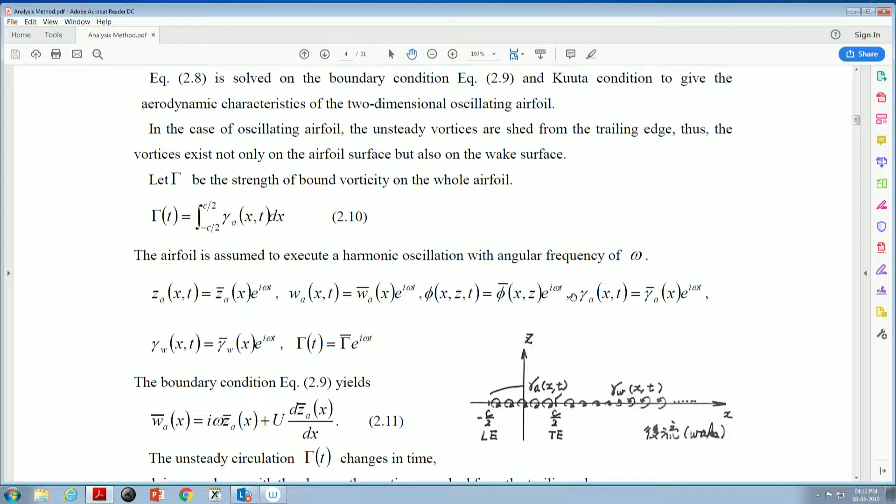Capital gamma is the strength of the bound vorticity on the whole airfoil, the circulation, expressed by this equation. Gamma A is integrated from the leading edge to the trailing edge. The airfoil is assumed to execute a harmonic oscillation, so we write the time term as exponential i omega t, and all variables are expressed in this form.

The boundary condition is written like this, equation 2.11. The unsteady circulation, capital gamma, changes in time, and in accordance with this change, vortices are shed from the trailing edge. At time t, gamma is gamma(t). At time t plus dt, gamma is expressed like this.

Only the first term is retained here. If the wake vortex strength is gamma W, shed from the trailing edge during time dt, equation 2.12 is derived from Kelvin's theorem. This represents the temporal change of the circulation, which is compensated by the wake vortex shed here.

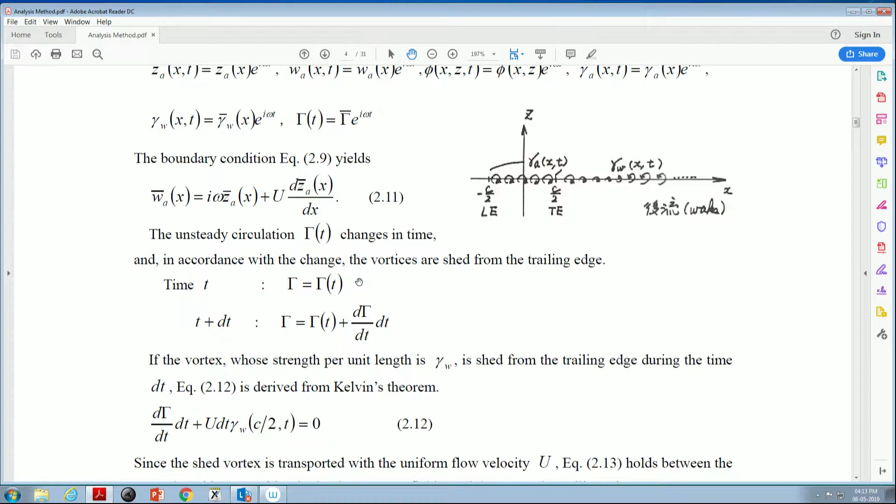As I previously said, gamma W is not independent from gamma A, because gamma W is shed from gamma A. So there is a relationship between gamma A and gamma W. Since the shed vortex is transported with the uniform flow velocity capital U, gamma W at an arbitrary position in the downstream field is related to gamma W at the trailing edge.

The right-hand side is the arbitrary position X. So gamma W at the arbitrary position downstream is related to gamma W at the trailing edge with the time lag shown here.

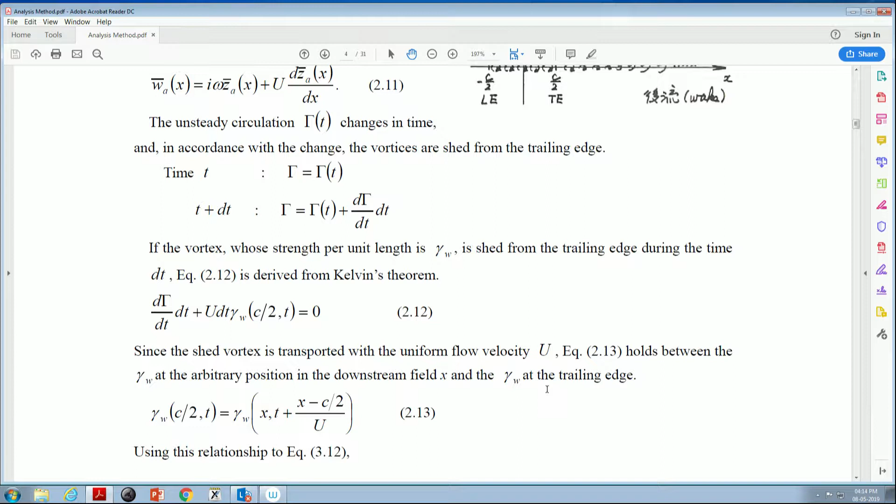Using this relationship in equation 2.12, we substitute gamma W into this expression, and we obtain this relationship with capital gamma. Capital gamma contains, of course, gamma A, so gamma A and gamma W are connected through this equation, which can be rewritten as 2.14.

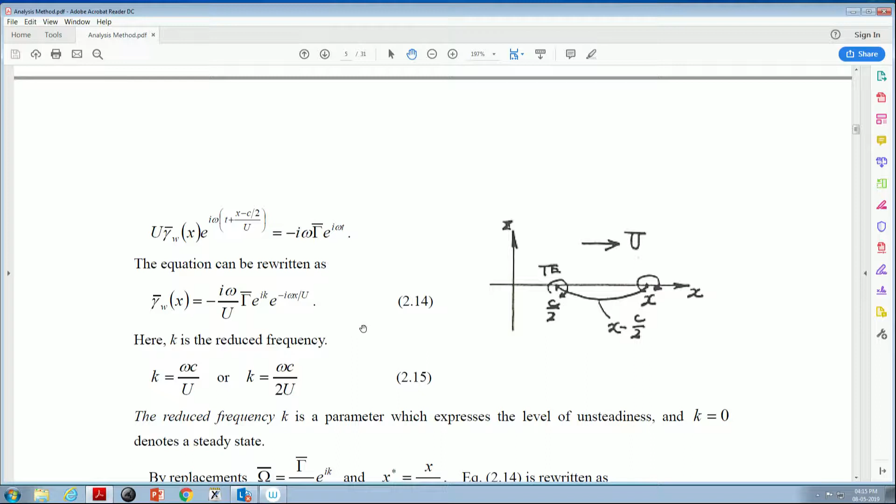Here a non-dimensional parameter K emerges, called the reduced frequency. This was also shown by Professor Maiti on the first day. The definition of K depends on whether we use the chord length or the half-chord (semi-chord) length, so we have to be careful—there are two kinds of K, differing here and doubly here.

The reduced frequency K is a parameter expressing the level of unsteadiness. K equals 0 denotes the steady state or quasi-steady state. Some replacement is done, non-dimensionalizing X or something, and then gamma W is rewritten as equation 2.16, which is a circulation parameter.

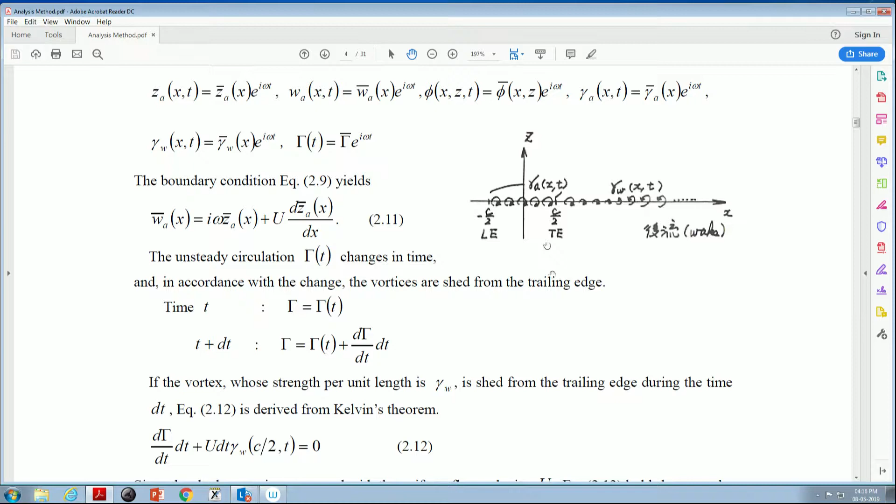We'll calculate WA, the induced velocity on the blade, in the Z direction. This WA can be calculated by the Biot-Savart law, as shown here.

The first term is the induced velocity from gamma A, the bound vorticity on the airfoil, integrated from the leading edge to the trailing edge. The second integration, from the trailing edge to infinity, is the induced velocity from gamma W, the wake vortices. So both vortices must be considered to calculate the induced velocity on the blade.

Using equation 2.16 for gamma W substituted here, we obtain equation 2.17. Here we have gamma A, which is the unknown parameter, and we changed the expression of gamma W into the circulation parameter form. So this is an integral equation for the unknown gamma A.

This is from a long time ago. It was analyzed by Professor Kutta and Professor Söhnge, and we need Söhnge's inverse formula here.

So from this integral equation, we directly have gamma A, the explicit expression of gamma A shown here, equation 2.18.

But be careful: on the right-hand side there is a circulation parameter omega, and it also contains gamma A. So it's not a free explicit expression of gamma A. We have to calculate this circulation parameter in another way.

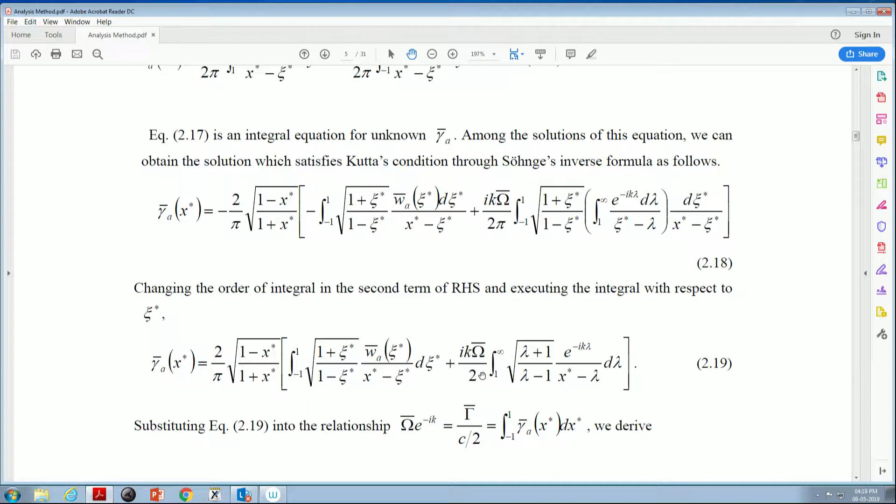So then we proceed with the integration calculation and we have 2.19. This relationship gives us omega, expressed like this. Using 2.19 into this equation, we derive 2.20 for the circulation parameter omega.

But in this expression we have WA on the right-hand side, so if we use the boundary condition here, we can calculate this circulation parameter. Then we use this circulation parameter in the previous expression, 2.19, and in this process we can finally get the value of gamma A successfully.

As written here, if WA bar is given based on the boundary condition, the unknown vorticity gamma A bar can be obtained from equations 2.19 and 2.20. So we got the value of gamma A.

So then we'd like to have the pressure data, or unsteady aerodynamic force on the blade. The pressure difference between upper and lower surface of an airfoil, delta PA, is related to the vorticity gamma A, so we'll calculate that relationship.

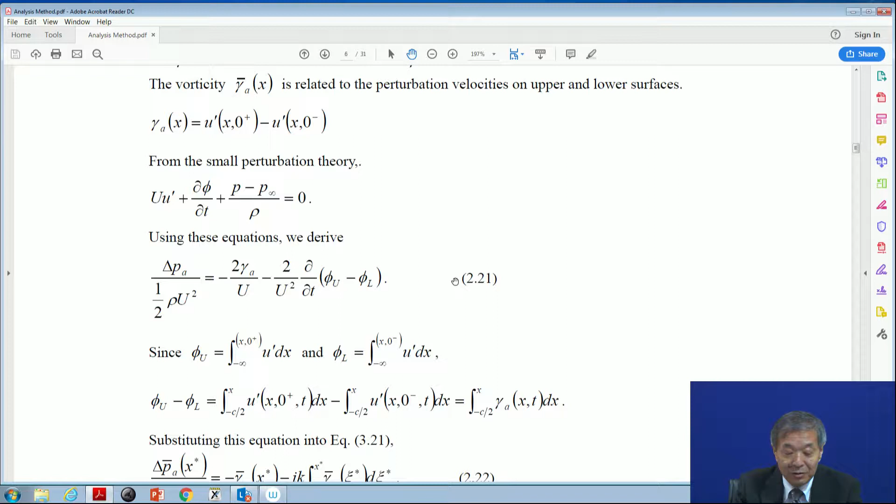So if we use this expression in this one here, finally we can get the delta PA expression in terms of gamma A only. So we could get the value of gamma A.

And if we use the gamma A value in this equation, we can calculate the pressure difference between the upper surface and lower surface, which is directly connected to the unsteady aerodynamic force on the blade.

And if we use equation 2.19 for gamma A into 2.22 here, we can calculate the pressure difference like this. This is the final form of the pressure difference between the upper surface and lower surface of a blade.

Here we have a function lambda expressed like this, and we also have the function Ck that emerges here. This function is called the Theodorsen function, given by this expression, Ck is a combination of Hankel functions.

So we need to get this, it's a function of the reduced frequency, and we put it into this equation. As I will show later, this Theodorsen function is the correcting term from the quasi-steady state to the unsteady state, so it's directly connected to the unsteadiness of the flow field or phenomenon.

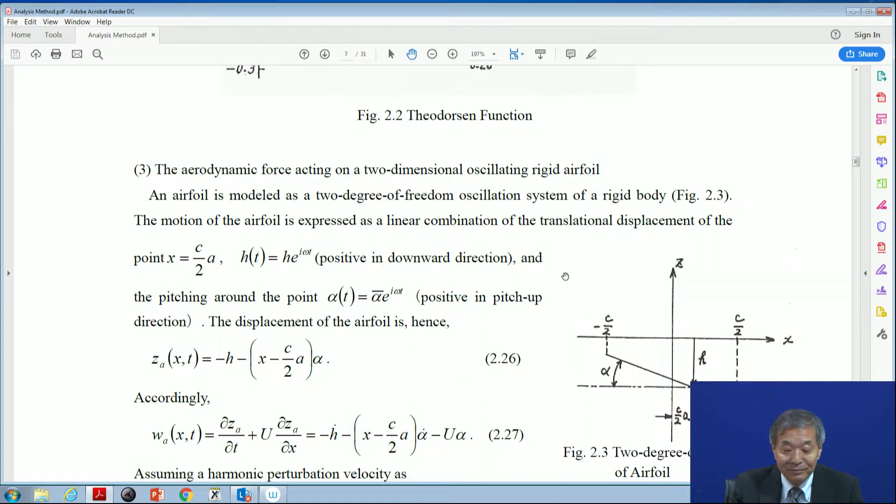And so this is a framework of the singularity method.

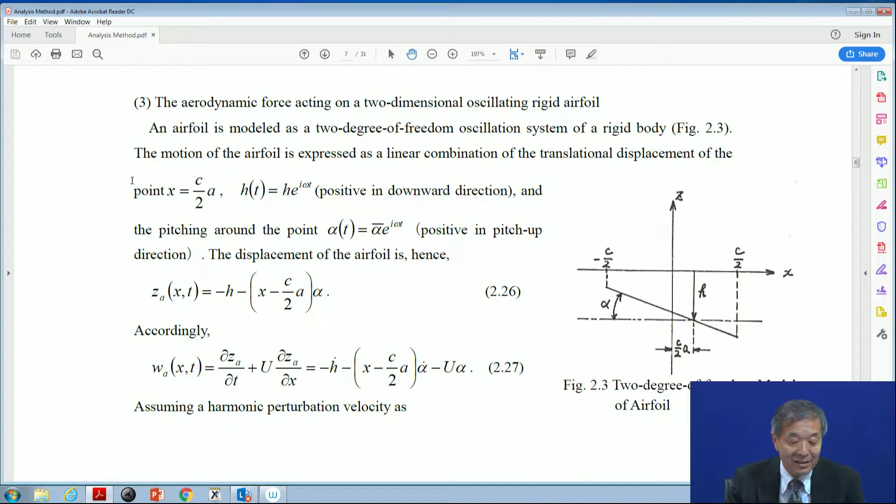But let us discuss, based on the theory, the aerodynamic force acting on a two-dimensional oscillating rigid airfoil. Very simple case. So an airfoil is modeled as a 2-degree of freedom oscillation system of a rigid body.

The motion of the airfoil is expressed as a linear combination of the translational displacement of the point x here, C over 2 multiplied by A. And HT is a displacement, positive in the downward direction.

It's displacement. And the pitching around the point here is alpha, positive in the pitch up direction. So the displacement of the airfoil is expressed as this, equation 2.26, ZA is minus H minus this one. It's a pitching motion. So accordingly, the WA is the velocity of the airfoil, can be calculated by this.

This is used as a boundary condition of the theory. So assuming a harmonic perturbation velocity as here, equation 2.27 is divided by exponential I omega t. So WA x asterisk is shown here. We can calculate the boundary condition WA here.

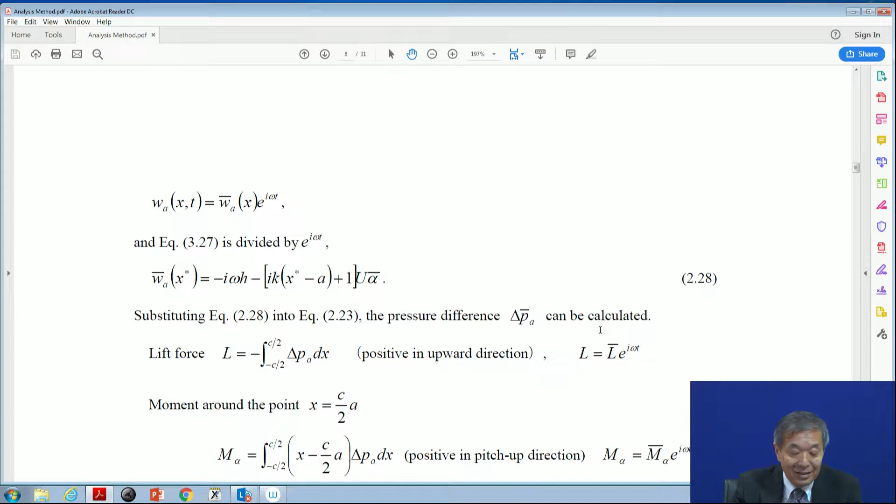And we use this WA into equation 2.23. The pressure difference can be calculated. I'll skip the detailed formulation, but I'll show the result.

Please follow the formulation if you have time and interest. The lift force L is calculated by the integration of the delta PA from leading edge to the trailing edge. And the moment around the point X equal C by 2, half chord multiplied by A, M alpha is the moment, is calculated by this expression.

So the results are shown here. 2.30 is the lift force, and 2.31 is the moment. It's a complicated expression, L and M alpha, and the components on the right-hand side of 2.30 and 2.31 are broken down or categorized into 3 forces and 1 couple of forces.

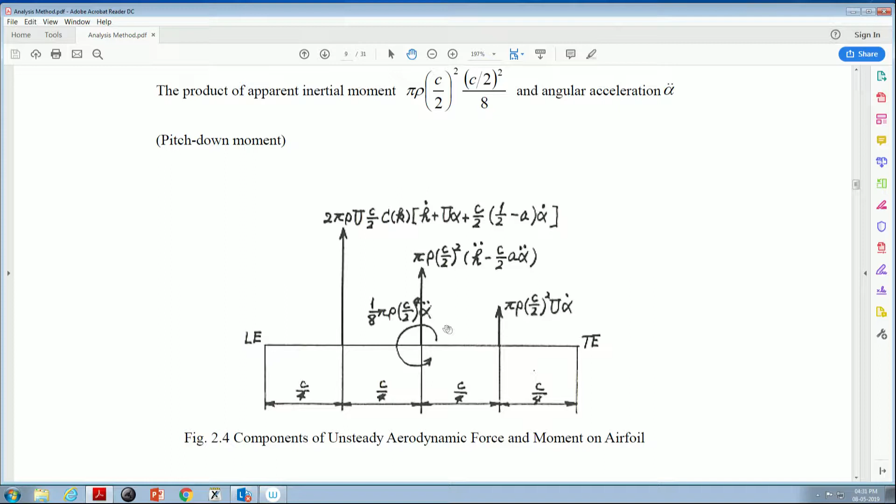It's shown in figure 2.4. So there are 3 forces shown by this arrow, and 1 couple of force here. So we can understand these forces like the following.

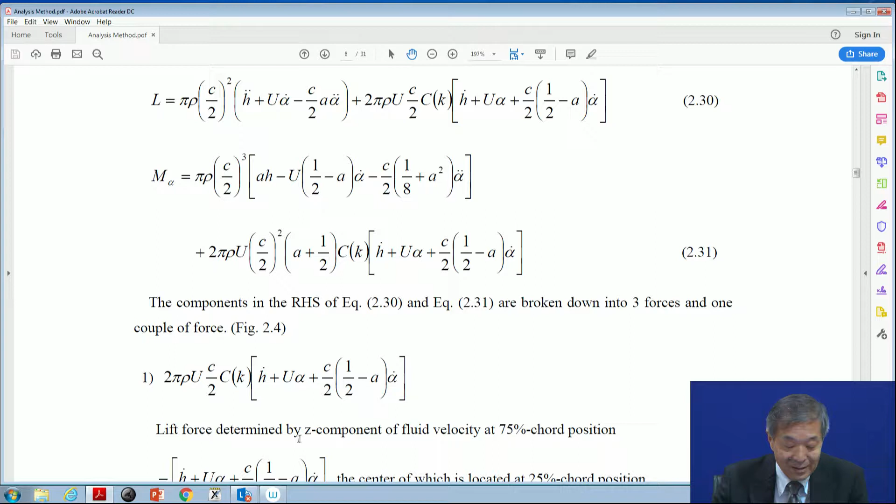The first one is here: 2 pi rho u half chord ck multiplied by this one. It's the second term of the lift force on the right-hand side. This is a lift force determined by the z component of the fluid velocity at the 75% chord position. It comes from here, and the center of which is located at the 25% chord position, the aerodynamic center. So this is the force shown by this arrow, working on this point. It's the first force.

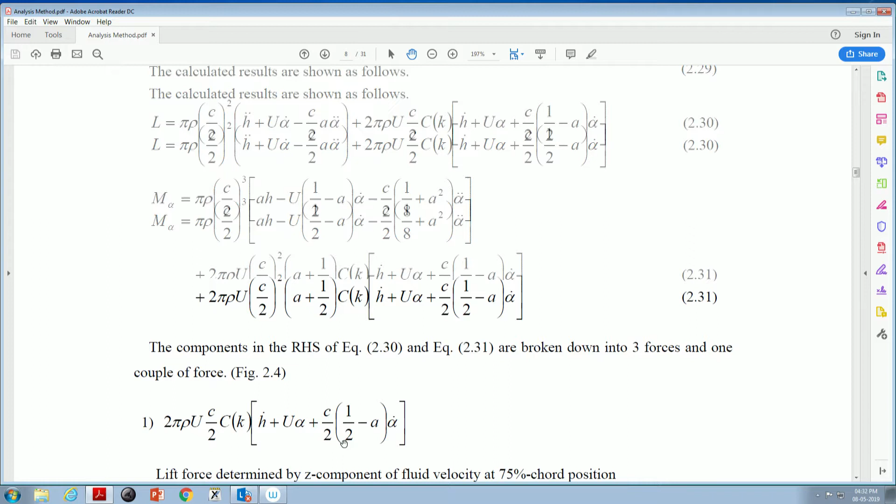And the second force is here. We have pi rho half chord squared, and this is an acceleration term, it comes from here. This is a lift force expressed as a product of virtual mass and the acceleration at the 50% chord position here. So this is virtual mass, or apparent mass, or added mass.

Professor Maiti calls it added mass, but another name is apparent mass or virtual mass. That is the mass of fluid around the airfoil. If the airfoil oscillates in the fluid, because of viscosity, the airfoil is followed by the air around it. So the mass is equivalent to pi rho multiplied by the square of the half chord. That is the virtual mass, apparent mass, or added mass, and this is an acceleration. So this force is acting at the 50% chord position, this one.

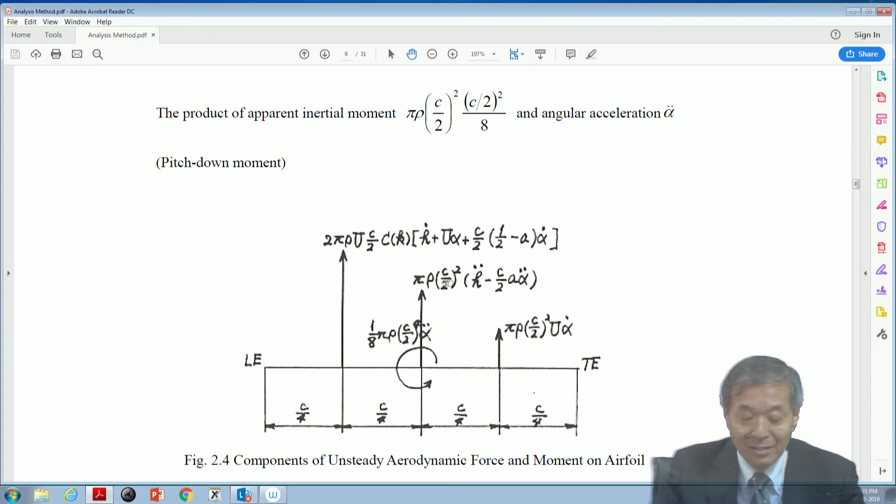And the third one is this one. It's a lift force expressed as the product of the virtual mass and u alpha dot, and the center of which is located at the 75% chord position. It comes from here, this one and this one, lift force. It's shown here, this one. So it's also related to the virtual mass here.

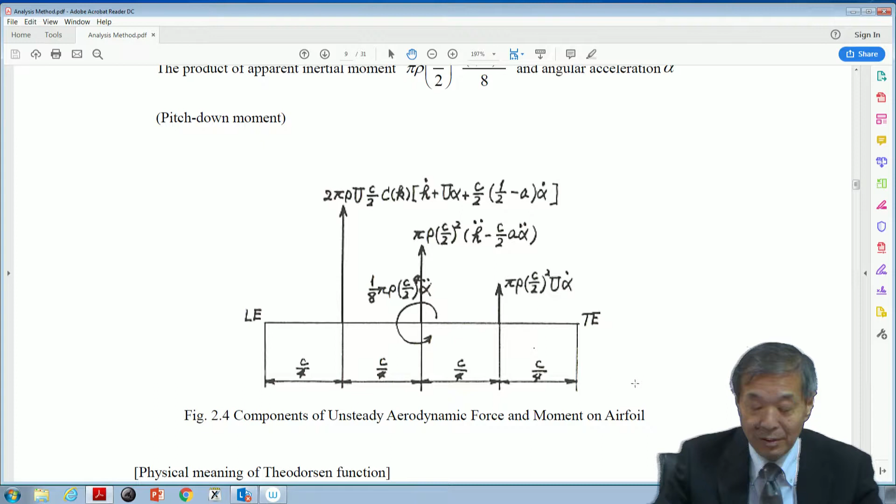And the fourth one is this one. It's a product of apparent inertial moment and the angular acceleration. It's a pitch down moment, so that is shown here.

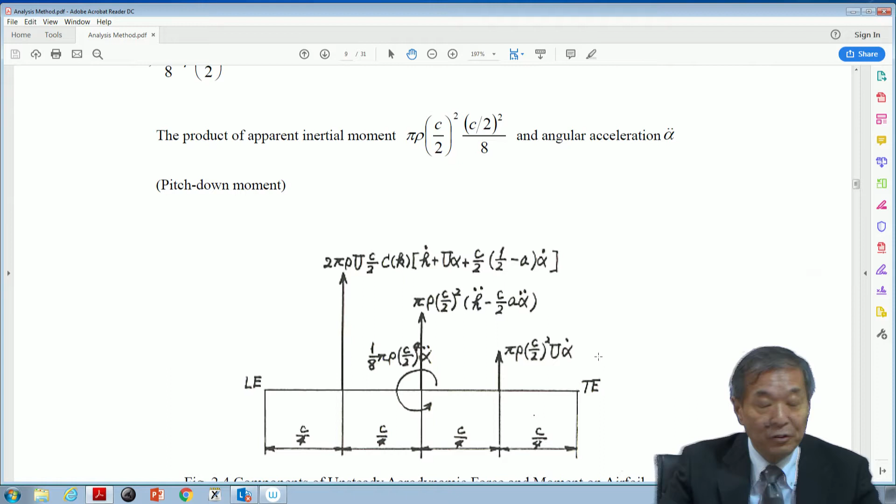So we can categorize the resultant forces into these 4 kinds of forces. This is the result of the very simple case of this oscillation model.

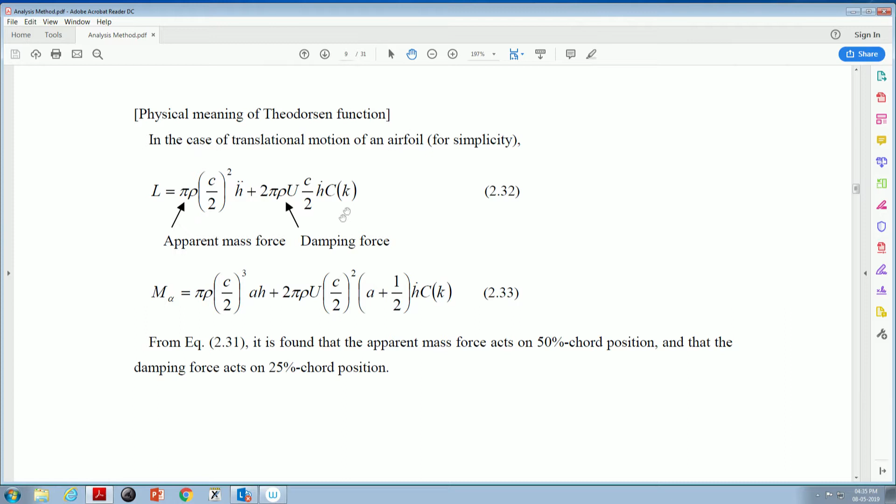Next is the physical meaning of the Theodorsen function. In the case of translational motion only, we have the lift force shown here. The first term is the apparent mass force, and the second is the damping force. M alpha is expressed as this. From equation 2.31, we found that the apparent mass force acts on the 50% chord position, and the damping force acts on the 25% chord position.

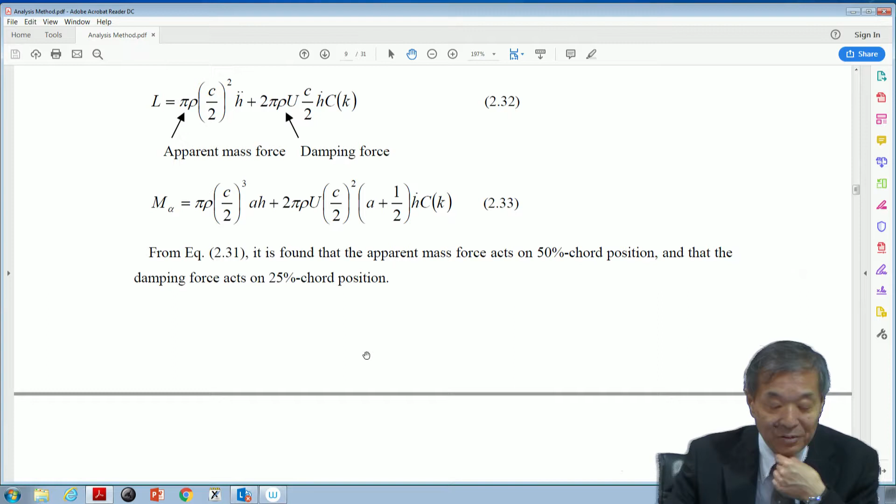So if the harmonic oscillation is slow, that is k nearly equals 0, Ck is unity. In this case, the damping force is here, corresponding to the quasi-steady aerodynamic force in translational motion. The damping force is described by a vector with a phase lead of 90 degrees from the displacement h.

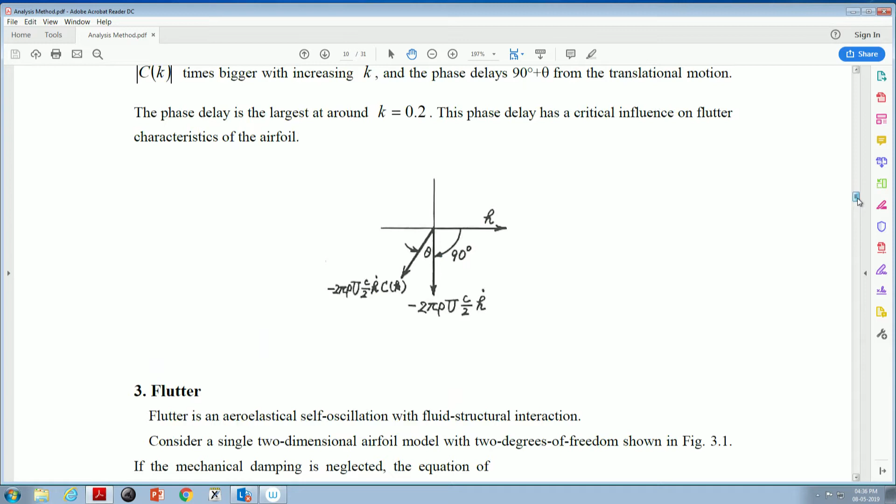The magnitude of the damping force becomes the absolute value of Ck, getting bigger with increasing k. The phase delays are 90 degrees plus theta. Theta is shown here in figure 2.2, this angle from the horizontal axis, which is the real axis.

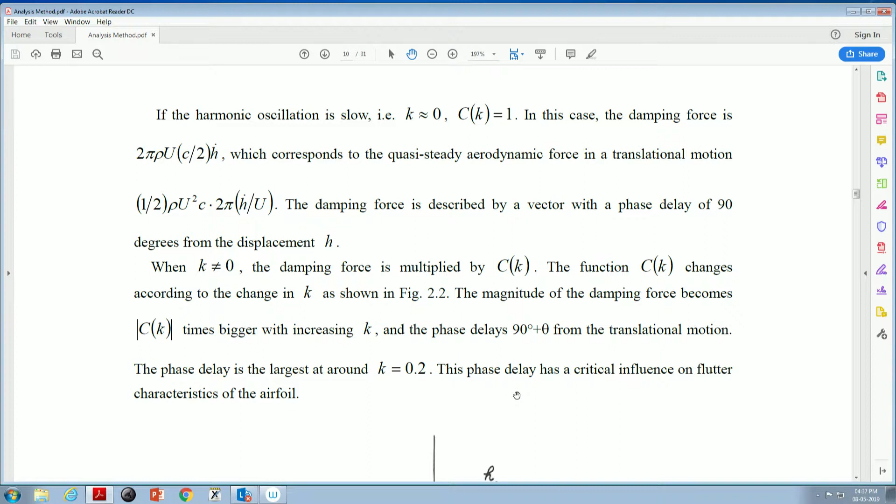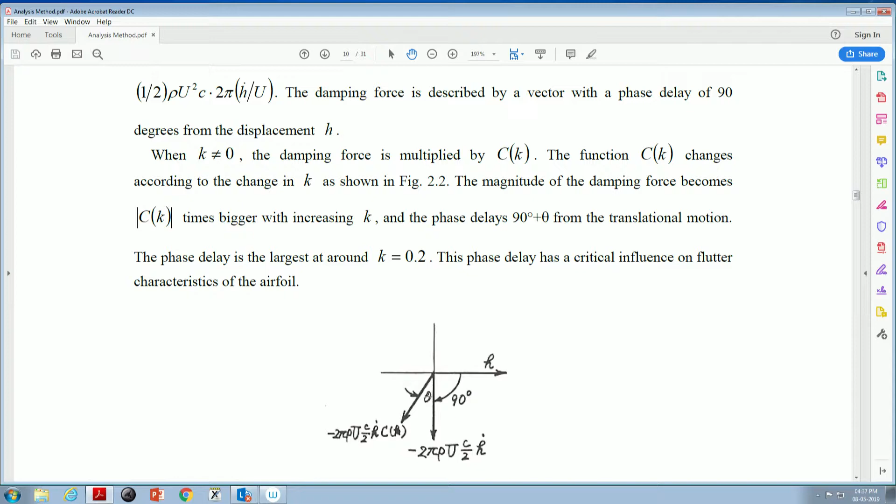This is theta, the phase lag of Ck. So the phase delays 90 degrees plus theta from the translational motion. The phase delay is largest at around k equals 0.2. This phase delay has a critical influence on the flutter characteristics of the airfoil. This is the damping force, and in the unsteady case, there is a phase lag of theta here.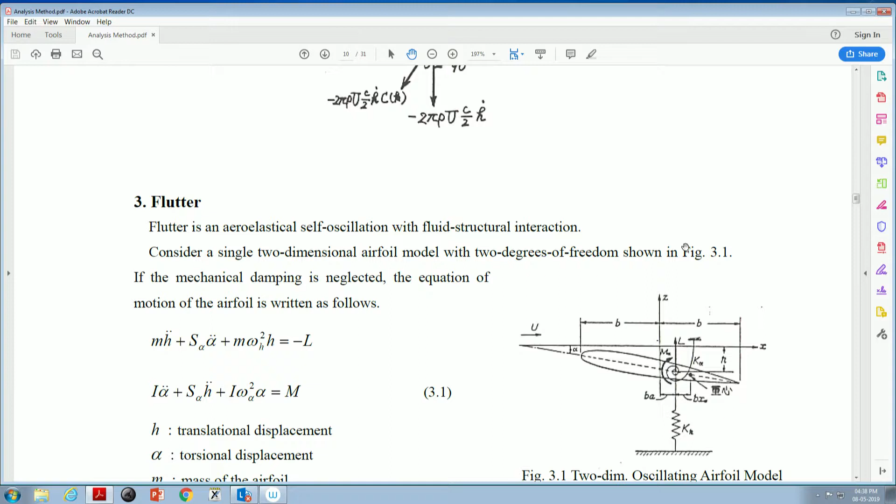This is the outline of the singularity method. Now we'll talk about flutter. Flutter is an aeroelastic self-oscillation with fluid structure interaction. Consider a single two-dimensional airfoil model with 2 degrees of freedom, shown in figure 3.1. The mechanical damping is neglected here; only the aerodynamic damping is considered. The equation of motion of the airfoil is written like this.

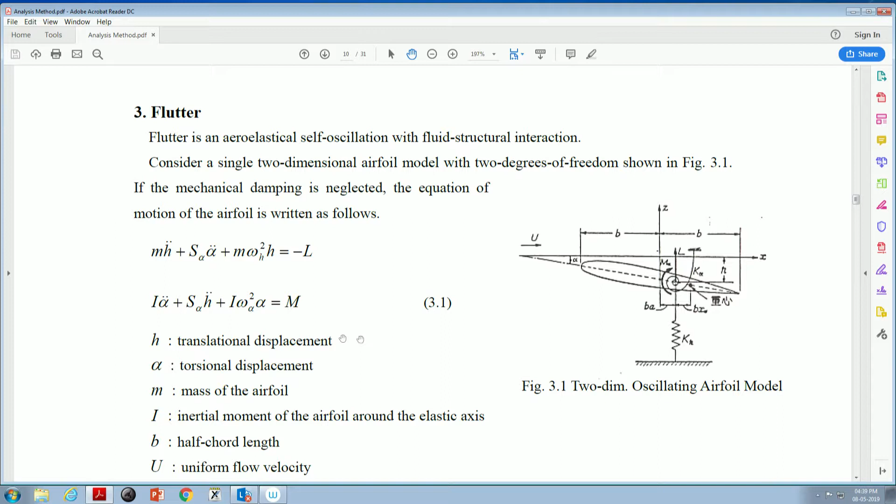This expression was also shown by Professor Maiti on Monday, and it's similar, but it neglects the mechanical damping. This concerns lift, and translational displacement is h, and torsional displacement is alpha. This is the moment expression.

In the case of small oscillation, h is this one, a harmonic motion, and alpha is shown here with a phase lag phi - the phase difference between the bending translational motion and the torsional motion. The unsteady lift and moment are expressed like this.

LH is the unsteady lift coefficient induced by the bending oscillation, and L-alpha is the unsteady lift coefficient induced by the torsional oscillation - torsional oscillation also induces lift change. MH is the unsteady moment coefficient induced by bending motion, and M-alpha is the unsteady moment coefficient induced by torsional motion.

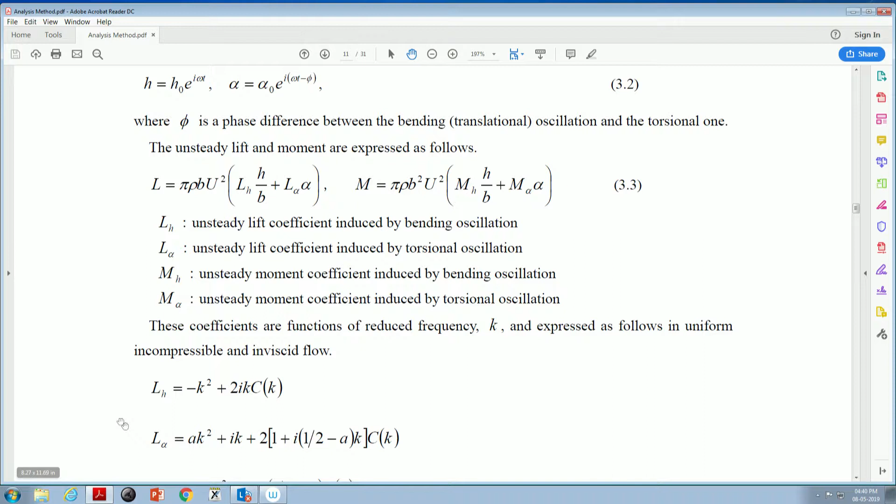These coefficients are functions of reduced frequency K, expressed as follows in uniform, incompressible, and inviscid flow. It's a very simple expression, containing Ck here, and M is shown like here. These are functions of reduced frequency mainly, and we need Ck for every term.

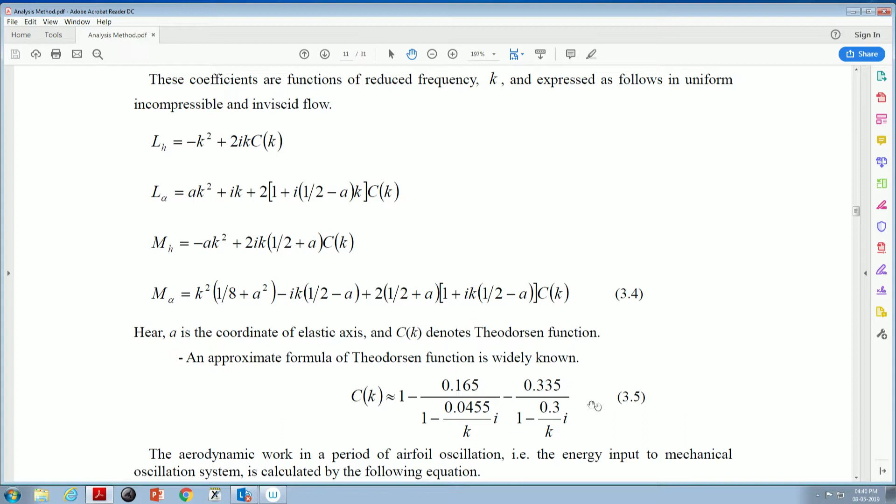A is the coordinate of the elastic axis, and Ck denotes the Theodorsen function. This is an approximate formula of the Theodorsen function - very convenient. The aerodynamic work in a period of airfoil oscillation is shown here.

R is the real part, HR is the real part of the displacement. This is the moment, and it's integrated over one period. If we use these above equations, we can calculate it as equation 3.6.

Here, suffixes R and I denote the real part and imaginary part respectively. So this is the work, and we consider this for evaluating the flutter instability.

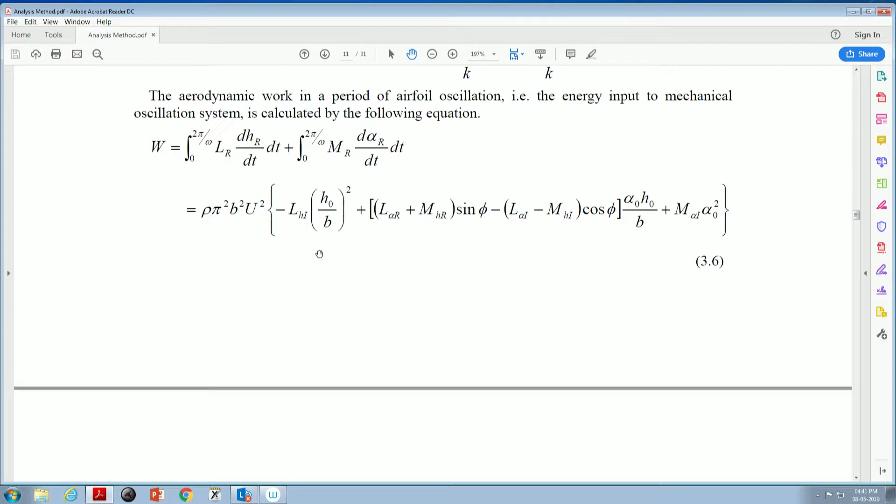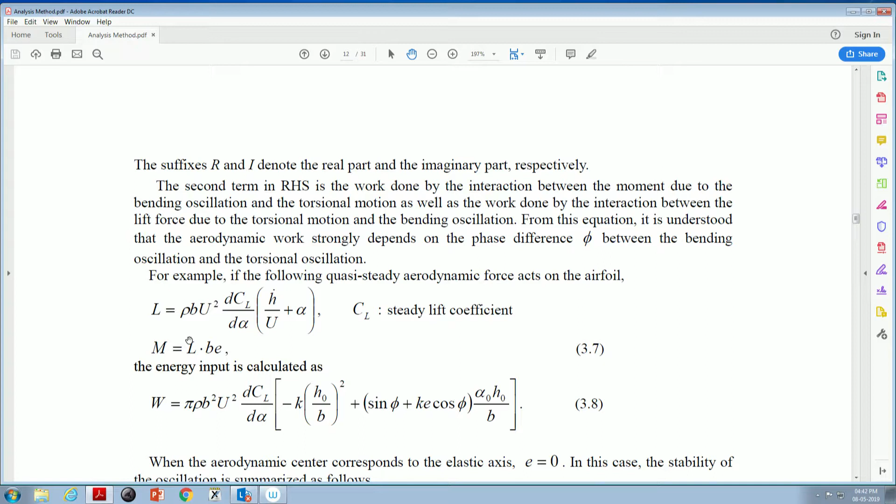This explanation is written here, but I'll skip it. For example, the quasi-steady aerodynamic force acts on the airfoil, so L is shown here as I showed previously. And M equals L multiplied by BE. The energy input is calculated as equation 3.8 - a very simple expression, similar to what was shown in this morning's session.

When the aerodynamic center corresponds to the elastic axis, E equals 0, so this term is eliminated. In this case, the stability of the oscillation is summarized as follows: for 1 degree of freedom bending oscillation, alpha-0 equals 0, so W is always negative, meaning it's stable. For torsional oscillation, H0 equals 0, so it's eliminated, and W equals 0 always.

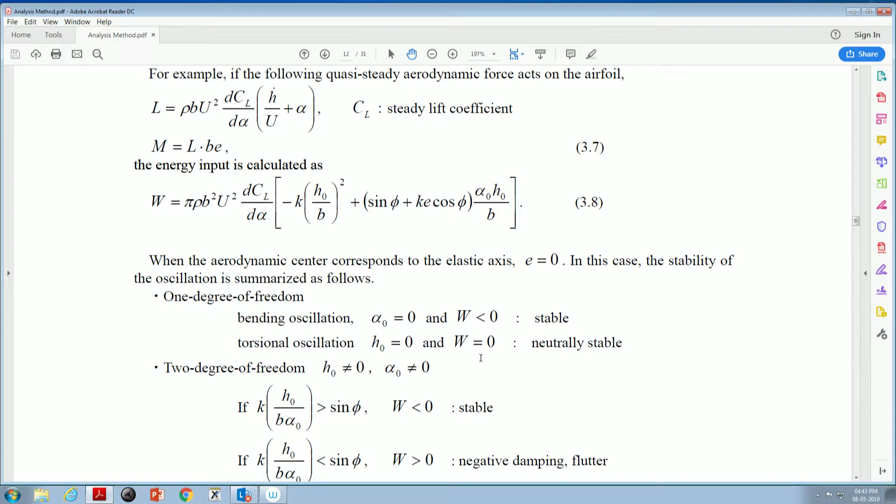It's a neutrally stable case. But in 2 degrees of freedom, H0 and alpha 0 is non-zero, so we need to evaluate the value of this one and of this one. If this value is larger than sine phi, W is negative, the stable case. But if this value is smaller than sine phi, W is positive, so it's negative damping flutter.

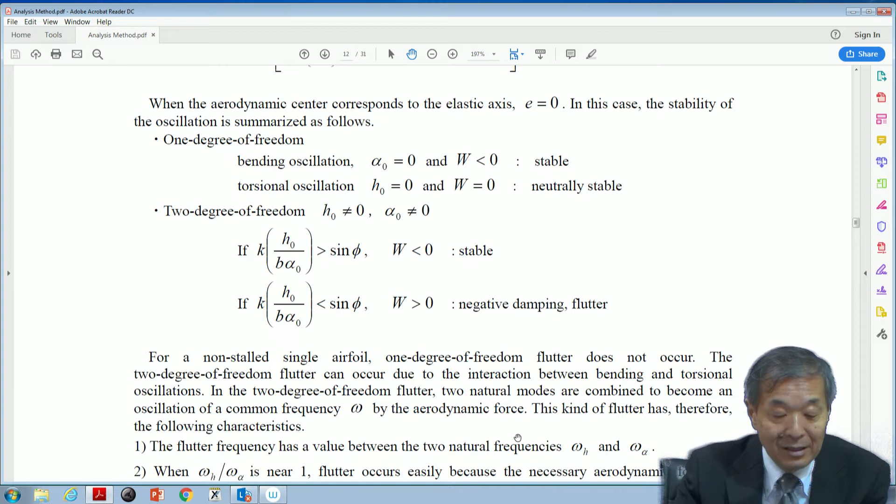So for non-stalled single airfoil, 1 degree of freedom flutter doesn't occur, as I showed previously. And 2 degree of freedom flutter can occur due to the interaction between bending and torsional oscillations. So the two natural modes combine to become an oscillation of a common frequency omega by the aerodynamic force. That is characteristic of the 2 degree of freedom flutter oscillation.

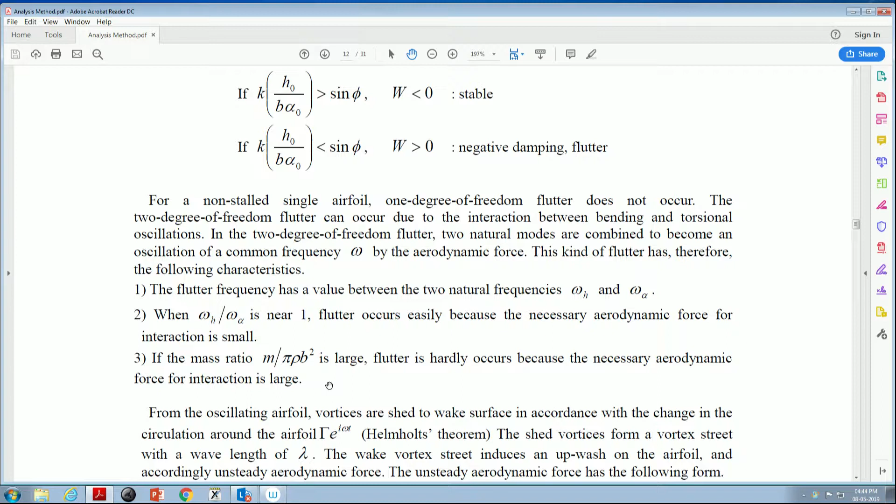Okay, so we'll skip these kinds of things.

From the oscillating airfoil, vortices are shed to the wake surface in accordance with the change in circulation around the airfoil. The shed vortices form a vortex street with a wavelength of lambda. The wake vortex street induces an upwash on the airfoil, and accordingly an unsteady aerodynamic force.

The unsteady aerodynamic force has the following form. This is a general expression of the unsteady force, and it's important to understand that F is composed of 3 terms.

The first term is the quasi-steady term, where K is 0. FW is the wake term, induced by wake vortices. And the third one, FM, is the apparent inertial term, concerning the apparent mass. So we have 3 components of the unsteady aerodynamic force.

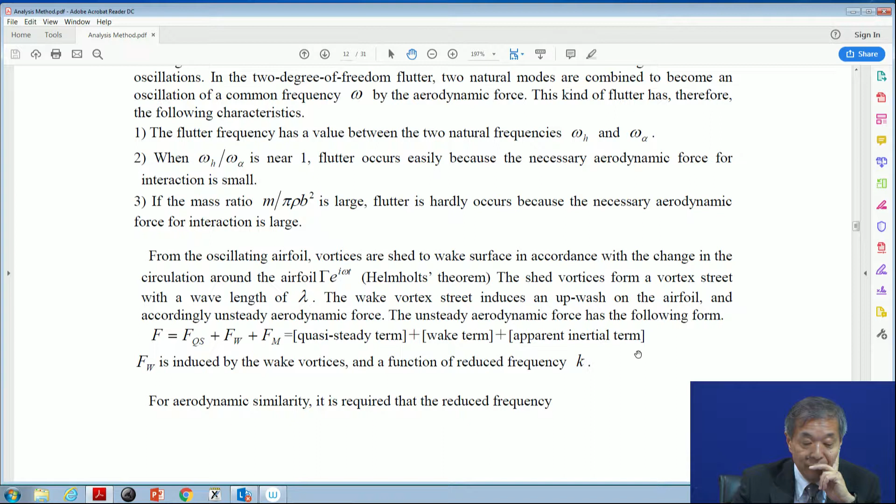So K is always important. For aerodynamic similarity, it's required that the reduced frequency K is identical. K is the ratio between the representative length of the airfoil and the wavelength of the wake vortex street. This is very important, and hence the reduced frequency is a parameter of unsteadiness and also simultaneously a parameter of aerodynamic similarity.

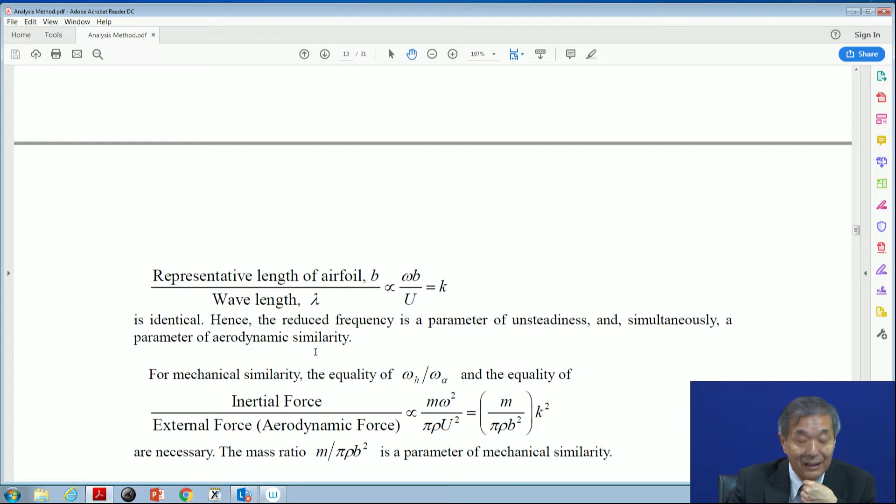For mechanical similarity, the equality of omega h over omega alpha, the frequency ratio, and the equality of the ratio of inertial force and external aerodynamic force are required. So this parameter is written like this, and rewritten by K here.

So the first term, m over pi rho b squared, is the mass ratio. It's called mass ratio, the ratio of the mass of the airfoil material and the mass of the fluid, air. It's a very important parameter. But in the compressor or turbomachinery, usually this mass ratio is very big, around 100, so we can treat the airfoil as a solid one.

But the problem is recently the mass ratio is reduced, because for fan blades, hollow airfoils or composite materials are used. So the mass ratio is nowadays reducing, and sometimes we have to consider the effect of the low mass ratio. It means there is some modification of the oscillation mode due to aerodynamic force. That is a very complicated situation.

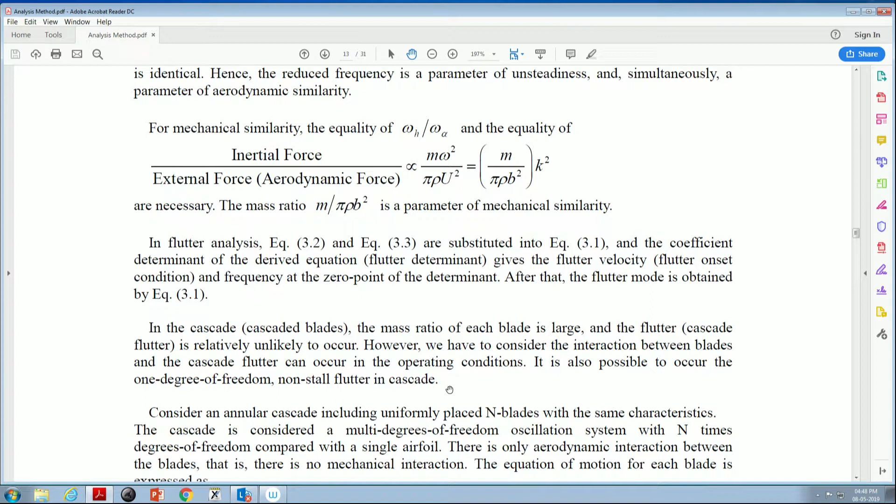So it's written here, in a cascade of blades, the mass ratio of each blade is large, and flutter is relatively unlikely to occur. However, we have to consider the interaction between blades, and cascade flutter can occur in the operating conditions. It's also possible for 1 degree of freedom non-stall flutter to occur in a cascade because of the effect of the other blades. That is the situation of cascade flutter.

This is an expression of the cascade. Consider an annular cascade including uniformly placed blades with the same characteristics. The cascade is considered a multi-degree-of-freedom oscillation system with n times the degree of freedom compared with a single airfoil. We assume that there is only aerodynamic interaction between the blades, and the equation of motion for each blade is expressed as this one.

Y is the displacement in the cascade direction, and this is the equation of motion, where F is the aerodynamic force. Since the mass ratio of each blade is large, the blade can be assumed to oscillate at its natural frequency omega, not affected by the aerodynamic force.

So the displacement yn is for the nth blade, where n is the blade number from 1 to n. The displacement yn is written as this one, a harmonic oscillation with frequency omega, and an is the oscillation amplitude of blade number n.

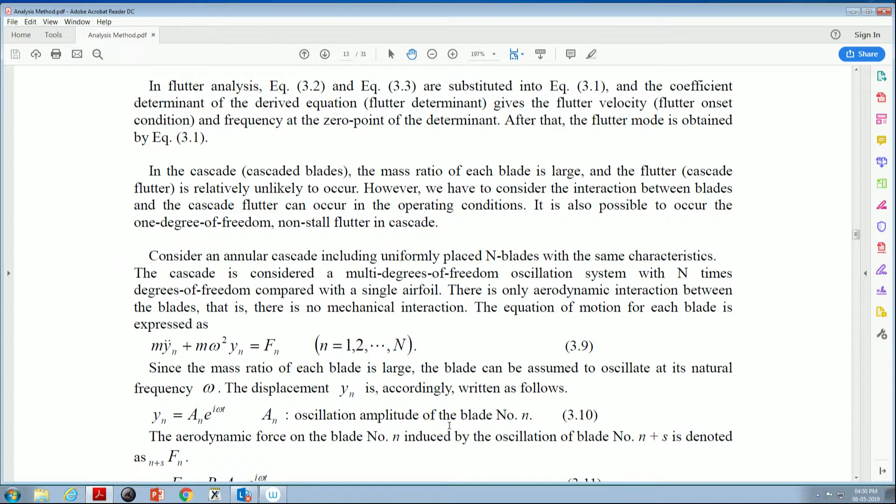The aerodynamic force on blade number n is induced by the other blades. The expression here shows blade n plus s affecting blade number n. So the aerodynamic force on blade number n induced by the oscillation of blade number n plus s is denoted as f, n plus s and n, expressed like this.

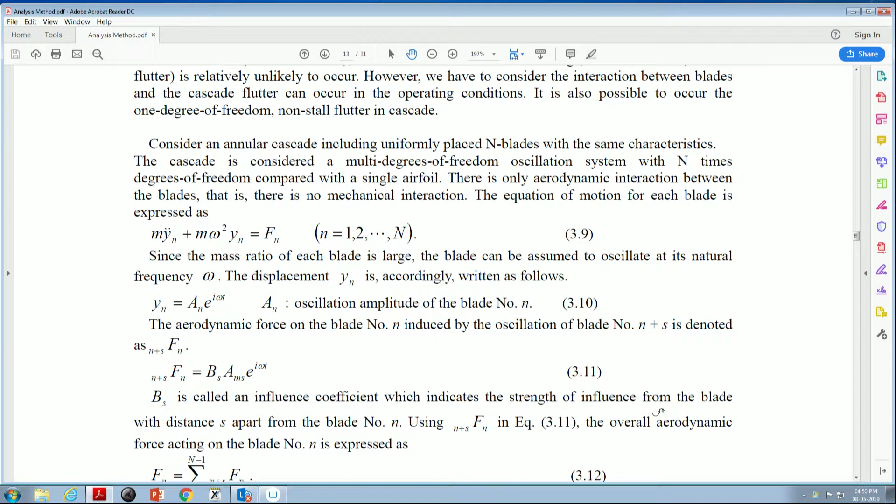Bs is called the influence coefficient, and it indicates the strength of influence from the blade at distance s apart from blade number n. The overall aerodynamic force acting on blade n is the summation of the effect of all blades: the summation from s equals 0 to n minus 1 of f n plus s n, exerted on Fn.

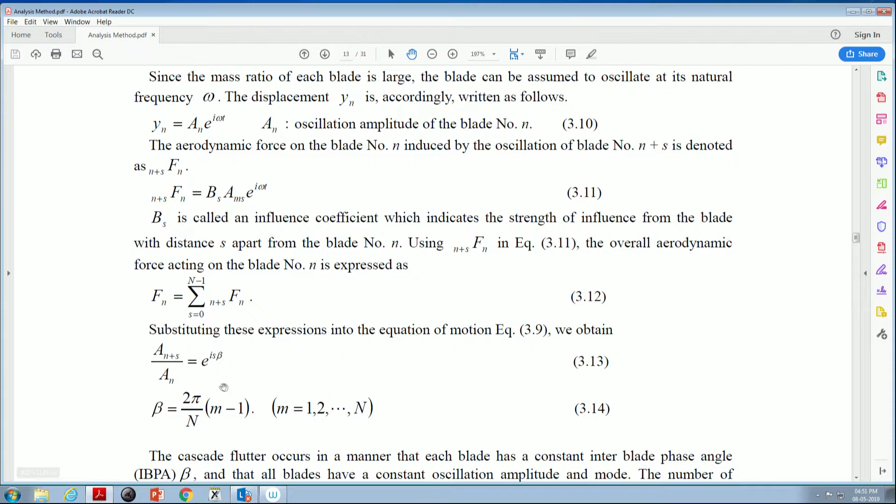Substituting these expressions in the equation of motion 3.9, we obtain the ratio of amplitude of an plus s and an as exponential i s beta. Beta is shown here, and this is the IBPA, the interblade phase angle.

So the cascade flutter occurs in the manner that each blade has a constant interblade phase angle, IBPA beta, and all blades have a constant oscillation amplitude and mode. The number of possible IBPA is n, the number of blades.

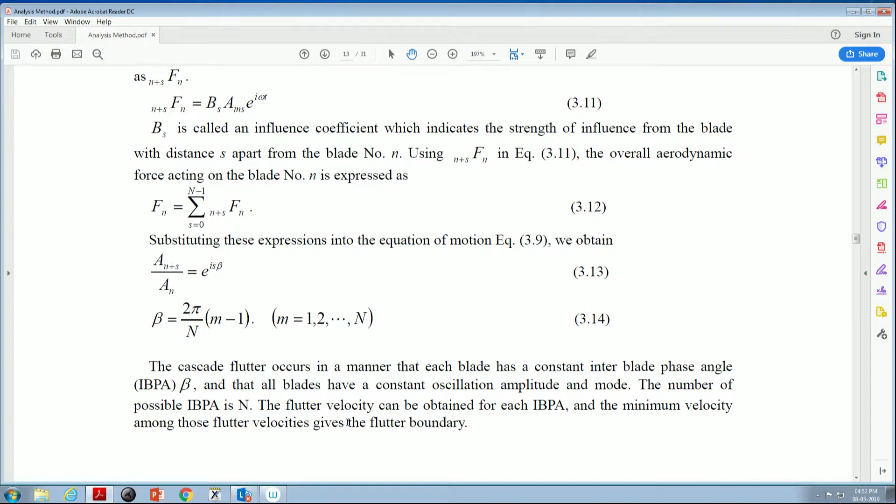The flutter velocity can be obtained for each IBPA, and the minimum velocity among those flutter velocities gives the flutter boundary. So we can select the IBPA at n sorts of values. But at each IBPA, we have a velocity, so a flutter boundary. The most dangerous case is the flutter boundary on that system.

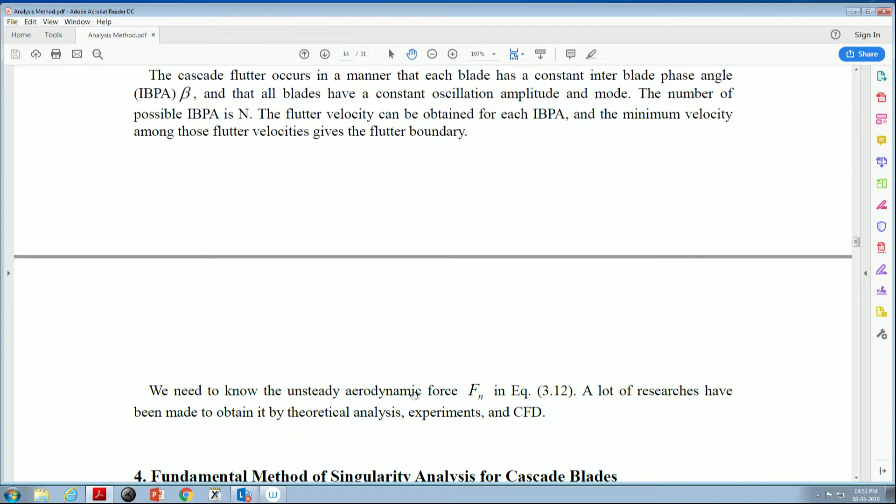So we need to know the unsteady aerodynamic force Fn, and this is a main issue from the aerodynamic side. A lot of research has been made to obtain it by theoretical analysis, experiments, or CFD. If we can have Fn, we can calculate or analyze the flutter instability.

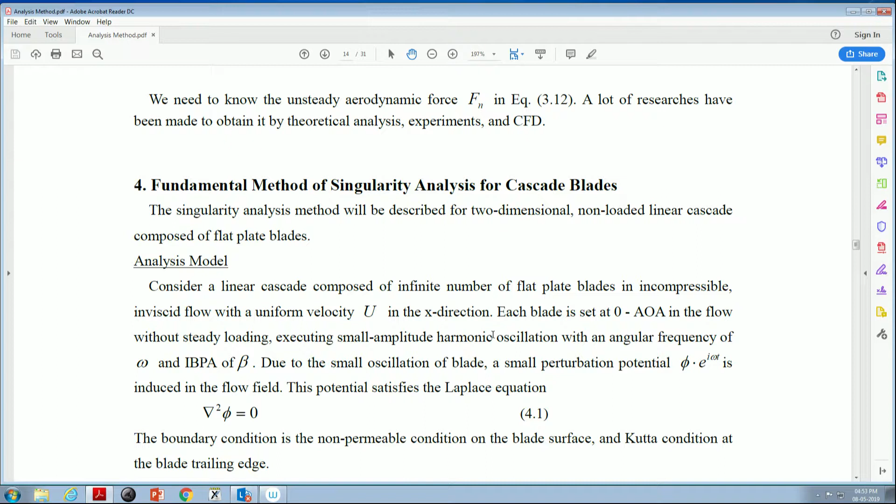Let us proceed to the fundamental method of singularity analysis for cascade blades. It's the same as the single blade, but we extend it to the cascade case. There are many blades, so we include all the influence of the blades into one equation. But you already know the fundamental framework.

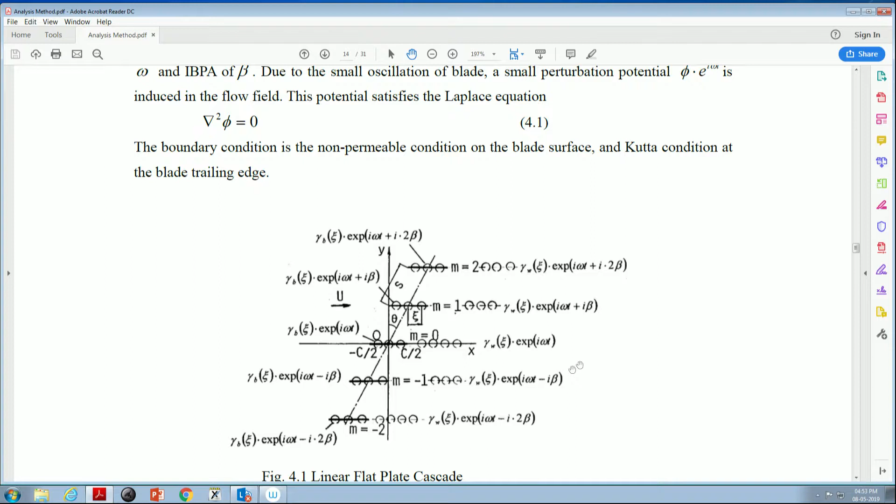The singularity analysis method will be described for a two-dimensional non-loaded linear cascade composed of flat plate blades. This is the analytical model, a common model of the cascade - a linear cascade composed of an infinite number of flat plate blades in incompressible, inviscid flow with a uniform velocity u.

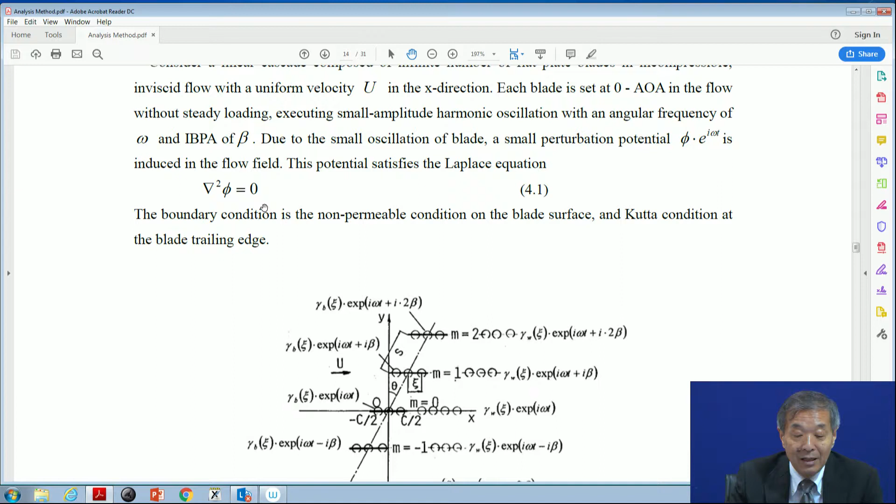Each blade is set at zero angle of attack in the flow without steady loading, executing small amplitude harmonic oscillation with angular frequency omega and IBPA of beta. The perturbation potential induced in the field satisfies the Laplace equation, and the boundary condition is the non-permeable condition on the blade surface and the Kutta condition at the blade trailing edge.

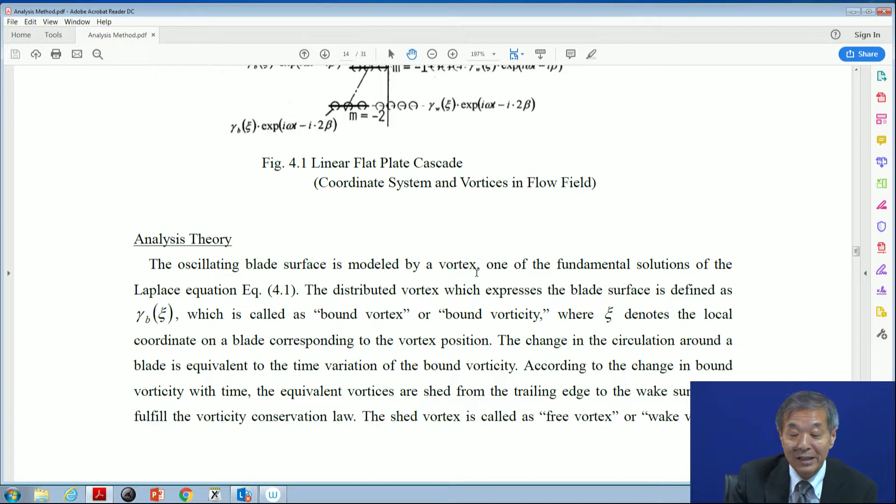In this case, the oscillating blade surface is modeled by a vortex, one of the fundamental solutions of the Laplace equation 4.1. Vortex is one of the basic solutions of the Laplace equation, so that is used as the singularity for this problem. It's called gamma B, a bound vortex or bound vorticity.

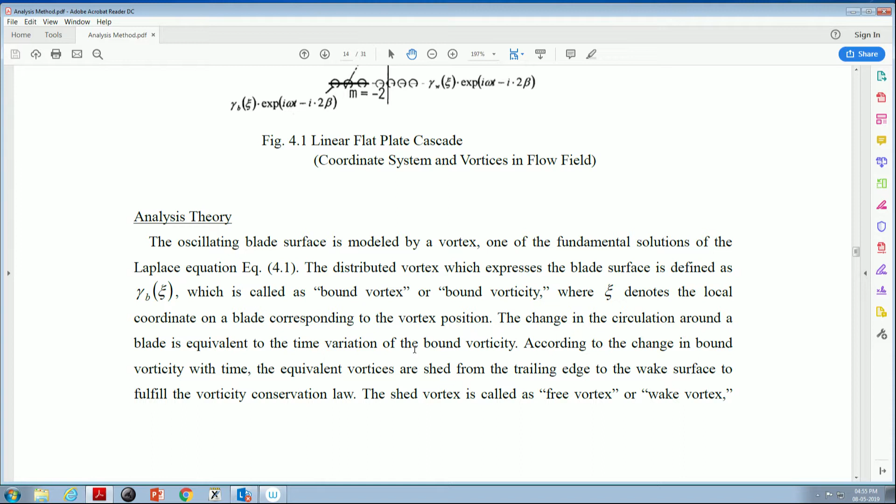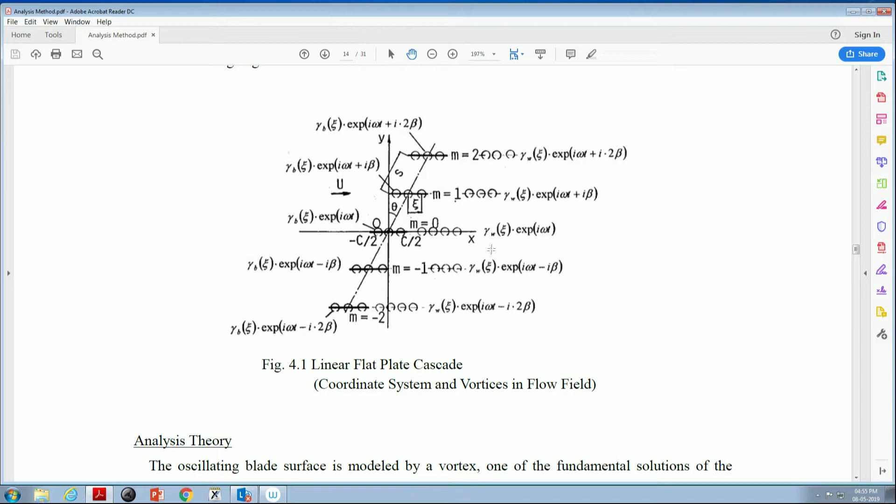Xi is the local coordinate on the blade surface. The change in circulation around the blade is equivalent to the time variation of the bound vorticity, and the change in bound vorticity generates the shed vortex from the trailing edge into the wake. This shed vortex is called the free vortex or wake vortex, written as gamma W, as shown here on each blade.

In the next step, the induced velocity on the blade surface by all bound vortices and wake vortices is calculated. By introducing the boundary conditions on the blade surface, the distribution function of the bound vortices is determined, and the aerodynamic force on the blade is obtained from that distribution function.

This is the y component of the induced velocity on the central blade, number 0, which is the reference blade. We calculate the induced velocity on this blade, then apply the boundary condition on its surface, so Vsx0 is expressed like this - as was shown in the morning session also.

This comes from the Biot-Savart law: this is the induced velocity by gamma B, the bound vortex, and the second term is the induced velocity by the wake vortex. But here we must include all blades, so M is the blade number, and the summation means we include the influence from all blades. XM and YM are the coordinates of each mth blade.

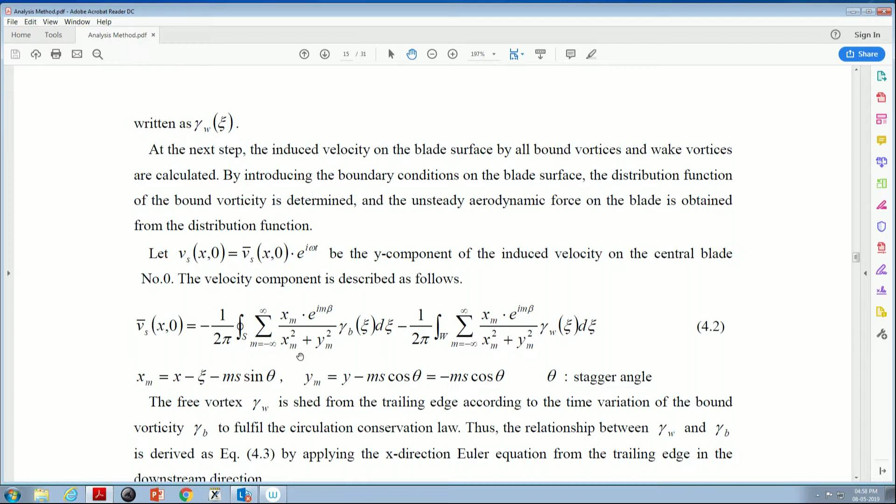So the framework is the same as for the single airfoil. The free vortex gamma W is shed from the trailing edge according to the time variation of the bound vorticity gamma B, to fulfill the circulation conservation law. So gamma W is shed from gamma B.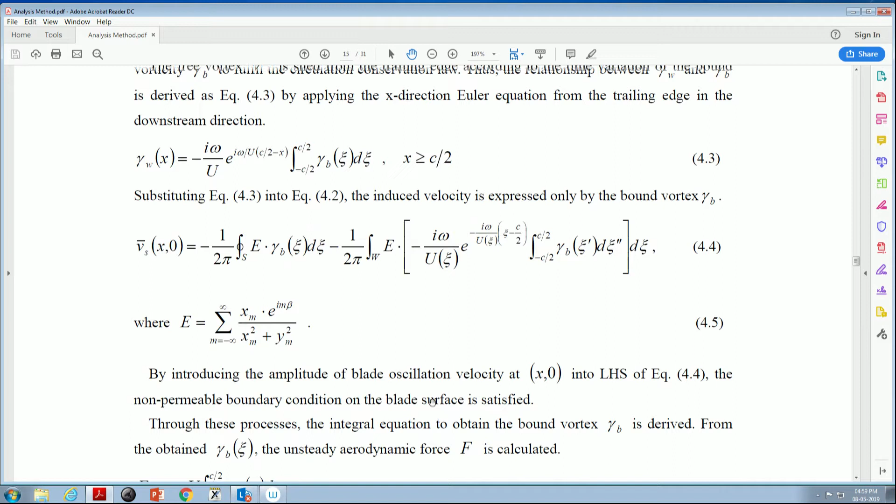So by introducing the amplitude of the blade oscillation velocity into the left-hand side of EQ4.4, the non-permeable boundary condition on the blade surface is satisfied. So we have to use the blade oscillation velocity as a boundary condition here.

So through these processes, the integral equation to obtain the bound vortex gamma b is derived. So this is the integral equation for gamma b. But in general, we cannot have an analytical solution, so we have to do some computation for an approximate solution.

So if we get gamma b, we can calculate the aerodynamic force by this equation. And this unsteady aerodynamic force is expressed as a non-dimensional one, Cf, which is F divided by rho c u q. Q is the oscillation velocity of blade. And this is a complex value.

So the real part is CR, and the imaginary part is CI. CR is the component in phase with the blade oscillation velocity, while the imaginary part CI has a phase 90 degrees advanced from CR. The real part corresponds to the aerodynamic exciting force, and the blade is excited when CR is positive. So we have to take care of CR.

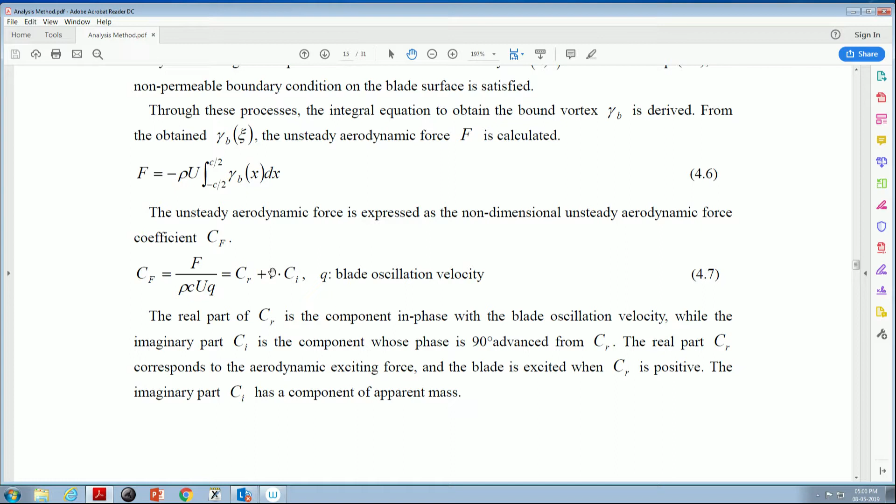This is the sign of CR. So that is the framework. But if we compute in realistic cases, there are several problems.

It's a complicated situation. The integral equation 4.4 cannot be computed by analytical method in general. But for some simple cases, we have an analytical solution like Söhngen's formula. In general though, we cannot use such an analytical solution, so we need to solve the equation numerically.

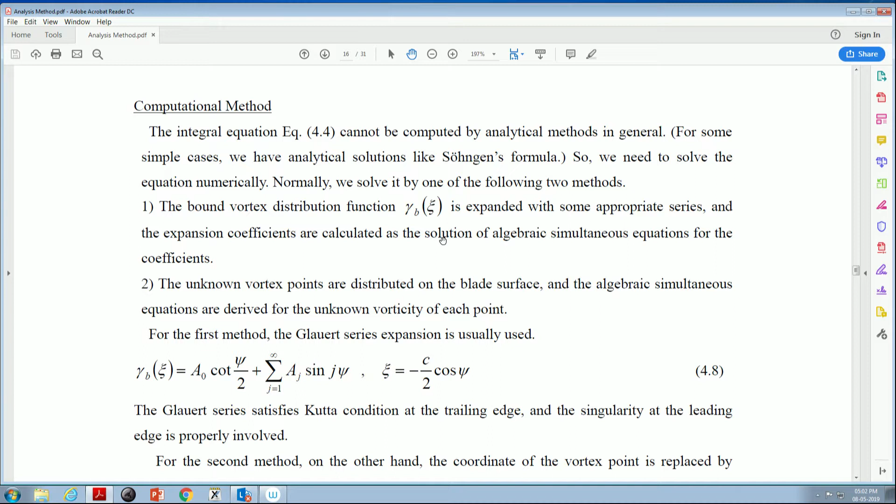So for numerical calculation, we can have two choices. The first one is that the vortex distribution function is expanded with some appropriate series. So series expansion can be used, and the expansion coefficients are calculated as a solution of algebraic simultaneous equations for the coefficients.

And the second one is that unknown vortex points are distributed on the blade surface. It's a discrete method like CFD, and algebraic simultaneous equations are derived for the unknown vorticity of each point. It's a panel method or something. But the first one is more sophisticated.

And for the first method, we usually use the Glauert series. It's a well-known series, expressed like this. The Glauert series satisfies the Kutta condition at the trailing edge, and the singularity at the leading edge is properly involved, so we usually use this one.

And in this equation, we expand gamma b by the Glauert expression, the Glauert series. The unknown is changed to the series coefficient, so that is easily integrated, and you can have matrix-type equations.

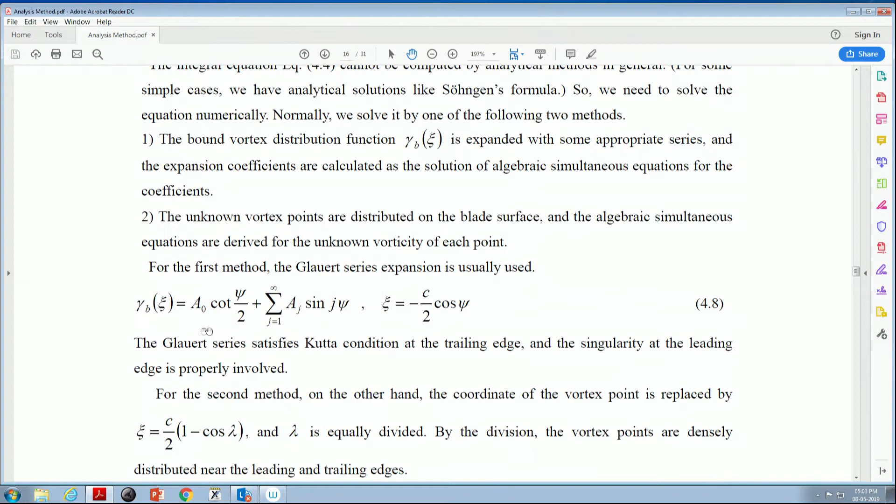And for the second method, on the other hand, the coordinate of the vortex point is replaced by here, and lambda is equally divided. So by this division, the vortex points are densely distributed near the leading and trailing edges. So this is also usable for calculation.

And from this point, it's only mathematical treatment, so please read it afterwards. And the problem is here, from here.

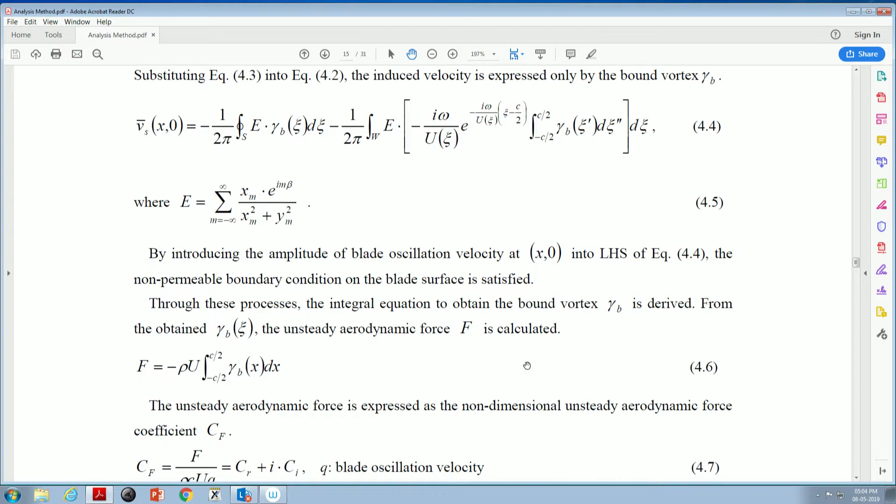So equation 4.4, we look at equation 4.4. We have a singularity in the kernel function of these expressions. So this integral has a singularity at... the singularity of x, 1 by x minus xi.

So xi is a coordinate, the position of the vortex point, and x is the position of the induced velocity we would like to calculate. So if the vortex point comes to the induced velocity evaluation point, the induced velocity becomes infinitely large. So that is the source of the singularity.

So for this singularity, we use some special treatment. It's a mathematical treatment to eliminate the singularity. I'll skip the detail, but it's a special treatment usually used for the integral equation, so you can read the textbook on integral equations.

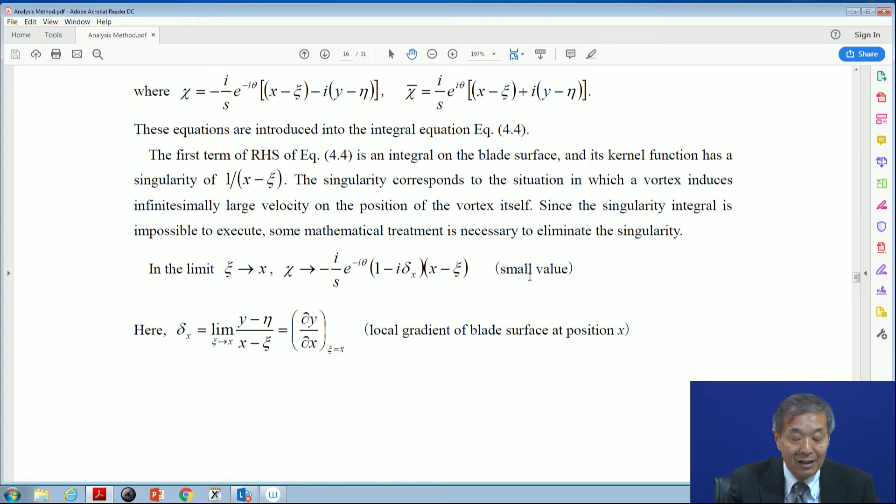Another problem is the summation. This one is a convergent summation, but the convergence is very slow—it's a 1/x type term, so the convergence is very slow.

So we usually transform this expression into a series of exponential functions. The series sum is simplified by using the following relationship, so we can use this series of exponential functions instead of the original form.

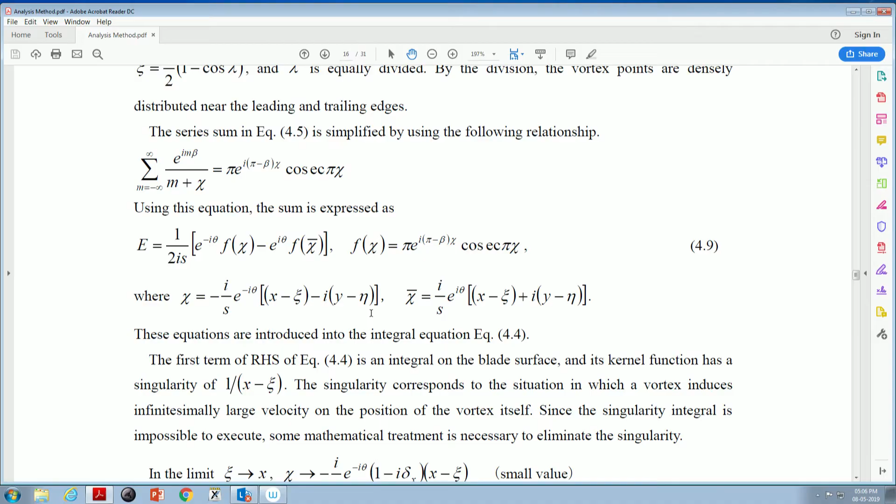I think there are two mathematically important treatments for solving this integral equation. But it's a very detailed point, so I won't go into detail—please look at the textbook on integral equations. Finally, this example is shown here.

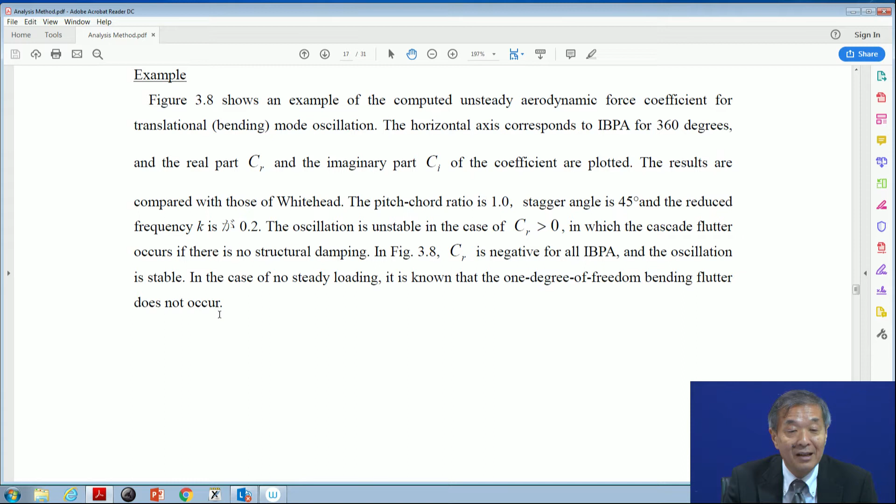This is only for a non-loaded blade, and as I wrote here, the oscillation is stable. In the case of no steady loading, it's known that the one degree of freedom bending flutter doesn't occur, so that corresponds to that knowledge.

So CI is also plotted here, and we can see this kind of S-curve, like I showed you before. So this is an example of the calculation.

The previous case was without any steady loading, so no angle of attack. But if we calculate the steadily loaded case, this method is also applicable for that case.

In that case, the blade surface is replaced by combined vortices: one is a steady vortex corresponding to the steady loading, and the other is the unsteady vortex expressing the blade oscillation. In the previous case we used only the unsteady vortex, but in the steady loaded case we need to use both steady and unsteady vortices.

We need to be careful to consider the additional unsteady vortex, because the steady vortex is oscillating, so it generates a new unsteady vortex. So we have the original oscillation unsteady vortex, and the induced vortex from the oscillation of the steady vortex—three kinds of vortices in the field. That's a very important point.

But it's possible to calculate the steady loading case, and also the three-dimensional problem—this method is also applicable there. I don't have a chart here, but in the three-dimensional case there is also a longitudinal vortex existing in the flow field, with its axis in the flow direction.

So we need to consider this longitudinal vortex also. If the blade doesn't have tip clearance, all the perturbation components can be expanded into span-wise modes, because it's continuous in the span-wise direction. For instance, pressure has cosine modes in the span-wise direction, and velocity has sine modes in the span-wise direction, so we can expand all the perturbation parameters into these series.

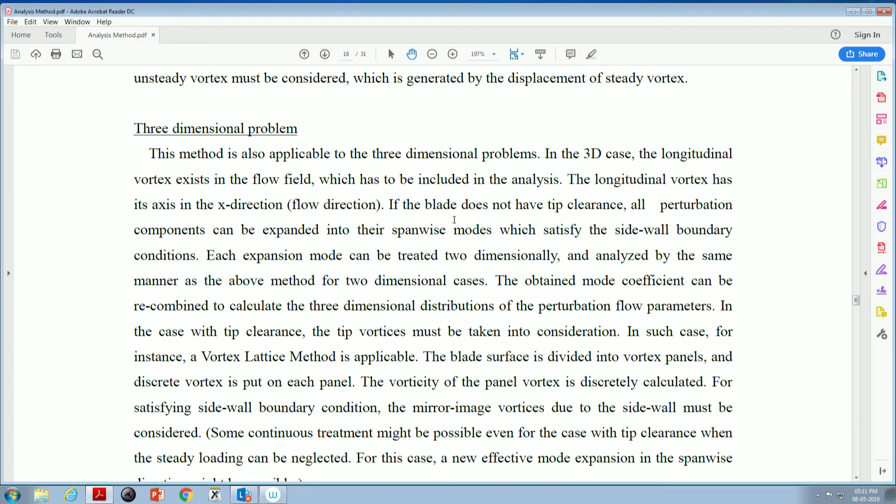So looking at one expanded mode, this becomes a two-dimensional problem—the span-wise coordinate is eliminated—so we can calculate it like the previous two-dimensional examples. Then, after the two-dimensional calculation, we combine all the modes into three-dimensional modes. That's relatively easy to calculate.

But if there is tip clearance—this was my PhD work—it's very complicated, and in that case we need to use some kind of discrete calculation, for instance a vortex lattice method.

The airfoil is divided into segments, and on each segment a vortex singularity is placed, and then we can calculate the strength of the vorticity discretely. That's possible, but it's very complicated and time-consuming.

So I have an idea for the last part here. Some continuous treatment might be possible even for the case with tip clearance, if steady loading can be neglected. My idea is that a new effective mode expansion in the span-wise direction might be possible, using wavelet transformation for this kind of problem, but I have not done it yet—maybe you can do that in the near future.